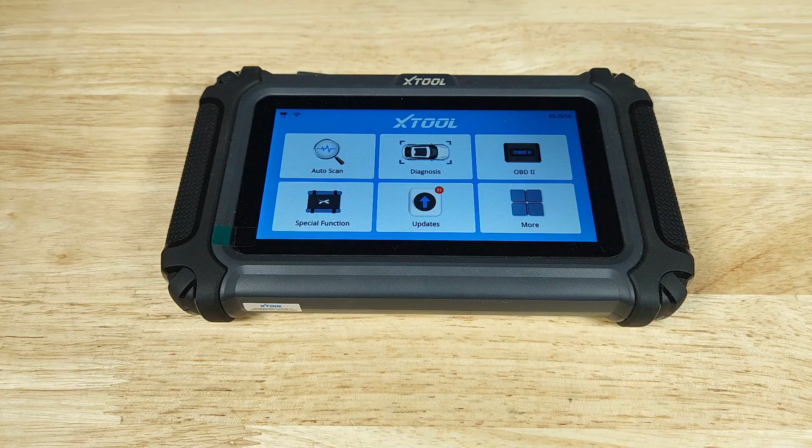Let's begin with some quick size references so you get a better idea of the overall size of this OBD2 reader. Here's a quick look at how thick it is -- just a little bit taller than a deck of cards. Let's take some rough measurements here. From end to end lengthwise, we've got just about 7.5 inches long. Let's see how tall it is -- just about 4.5 inches this way. And let's run a ruler across this way to see how thick it is -- just under an inch, looking like about 7/8 of an inch thick.

All right, let's get this on the scale so you know how much weight you're going to be hanging on to. Coming in at right around 14.1 ounces. And just in case you're wondering what 14.1 ounces feels like, if you've got a bottle of water around the house, fill it about 3/4 of the way -- that'll get you pretty close.

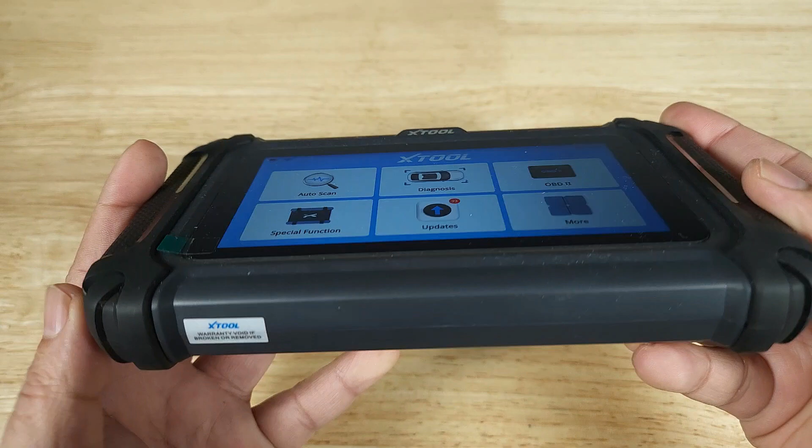Very clean and simplistic design. Plastic housing, rubber grips on the sides, gorgeous color screen about 5.5 inches. There are no ports on the bottom or sides -- everything's in the front here. This is where your data cable plugs in, and the on/off switch. Underneath this flap we have your charging port, a USB-C, and a slot for a micro SD card supporting up to 32 gigabytes in case you want to save anything. It also has an internal battery of 3,150 milliamps in case you want to take this around and view your data.

Here's a look at your opening home screen. You basically have these 6 tiles. We're going to be doing most of our dancing on this guy right here, but I want to point out this one first -- updates. You can see I have 93 updates waiting, and a great benefit of this device is you never have to pay for them. Updates are lifetime, free. Some devices charge you an annual or monthly fee, and those are really important to have because manufacturers are always sending out updates so you can continuously repair your car. But with this device, updates are lifetime, free.

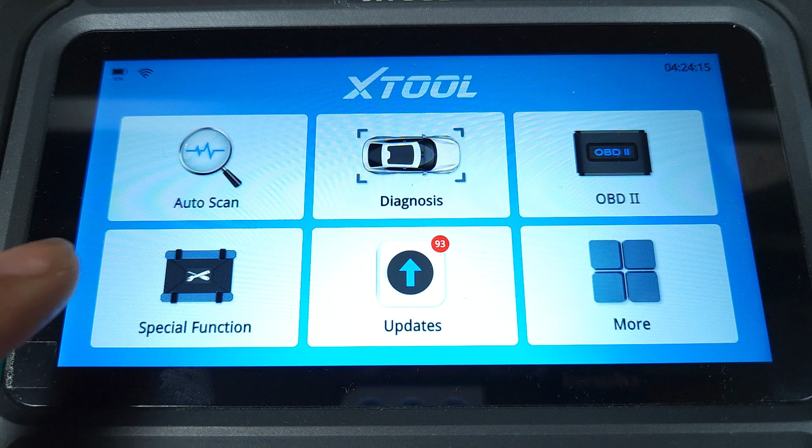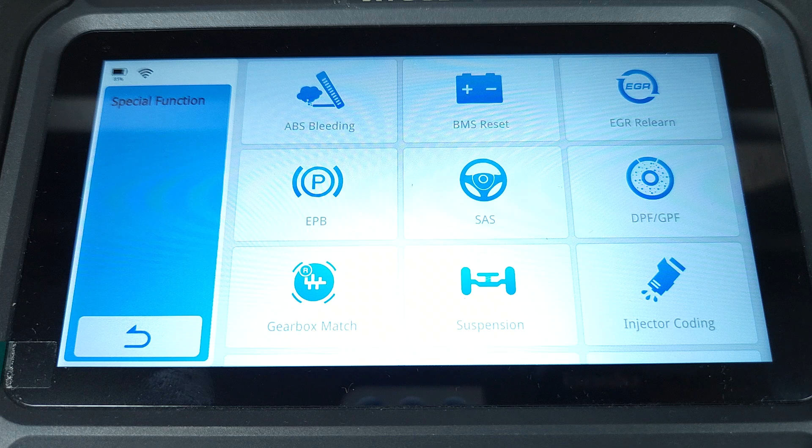This device will enable you to read information from your engine, transmission, airbags, and brake systems. Here on the bottom left we have the special functions tab, giving you access to 15 of those with this device. Most of the time you'll use this after a major repair -- you plug it in so the computer can relearn certain settings. I'm more excited that I can use it to reset my tire pressure sensor, because when there's a temperature change your tires go flat and you have to reinflate them at least 2 or 3, maybe 4 times a year. It's really nice to have the ability to reset this by just plugging it in.

All right, let's put this baby to work. Now, this next portion is not professional advice, but I at least want to show you guys one of the things I scan for when I'm trying to buy a used car.

We're going to have a look at the oxygen sensor voltages. There's a couple of really good reasons why you want to look at oxygen sensor voltages. Number one, of course, to make sure that they're working. Because if you've ever tried to get an O2 sensor out, especially if you're in a state with a lot of rust, sometimes those sensors are in places that are really hard to get, and sometimes they're just frozen on there. So to avoid that whole hassle, just make sure they're working.

Second, it gives you an idea if your engine is running lean or rich. If the voltages stay low, that means it's lean. If they're super high, that means it's rich. It gives you an idea if there may be a vacuum leak coming from the engine or if your fuel injectors aren't working. So that's another reason to check your O2 sensors.

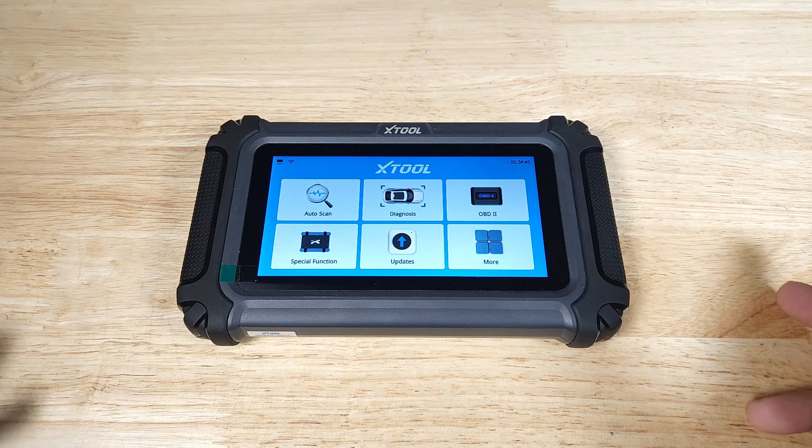And then finally, the big one: it gives you a really good idea if your catalytic converters are working or not. Really important, especially if your car has 2 catalytic converters.

Let's have a look. All right, guys, we are plugged in. Engine is not on, and I just wanted to show you that when you're plugged into your car's OBD2 port, it's charging the reader at the same time.

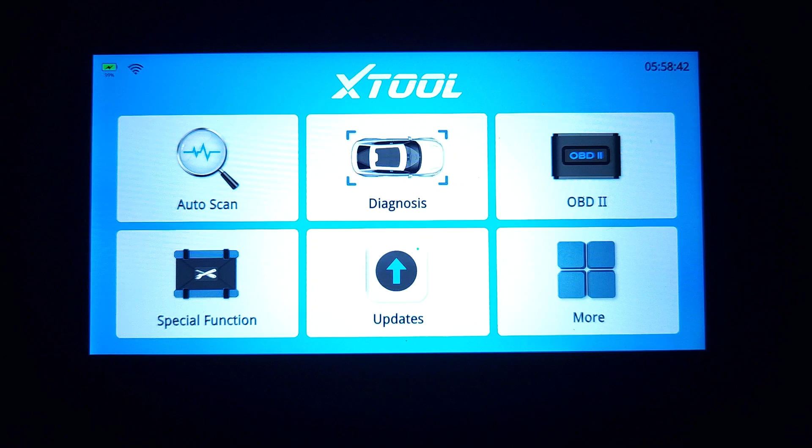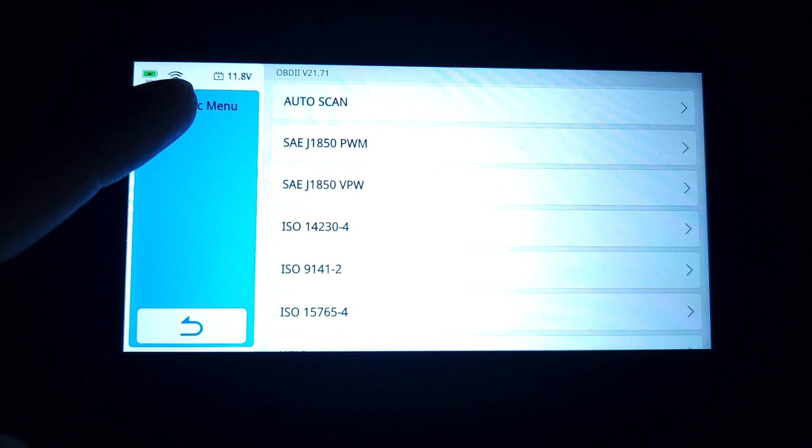All right, gonna turn the key on to the first click, click on OBD2, let it run. Here's what the next screen looks like, and before hitting auto scan, just wanted to point out that you can see your current battery charge, and it's really low, right? 11.8. It should be at 12.5, so that's a good bonus feature to have.

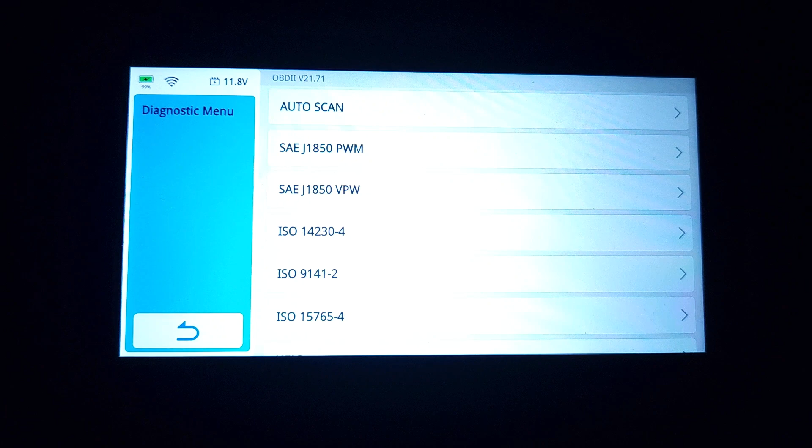Another thing you can use that for is when you start your car, if your alternator is working properly, that should jump right around 14.5 volts. So a nice little touch up here.

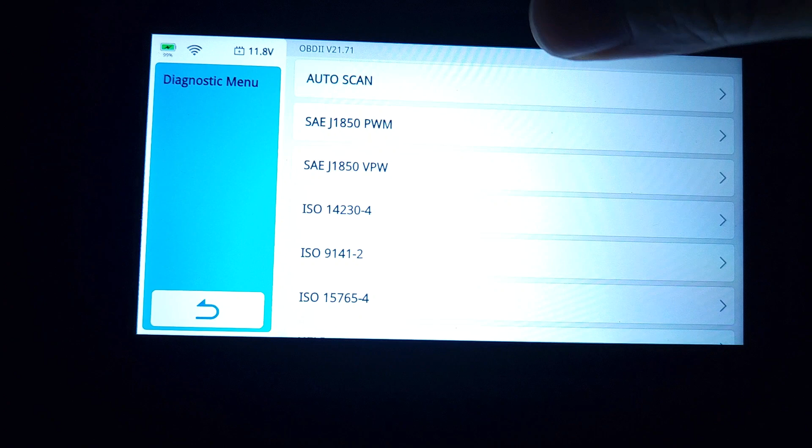Now we're going to touch auto scan. Here's what the next screen looks like. We're going to be doing all of our work right here in live data mode 1.

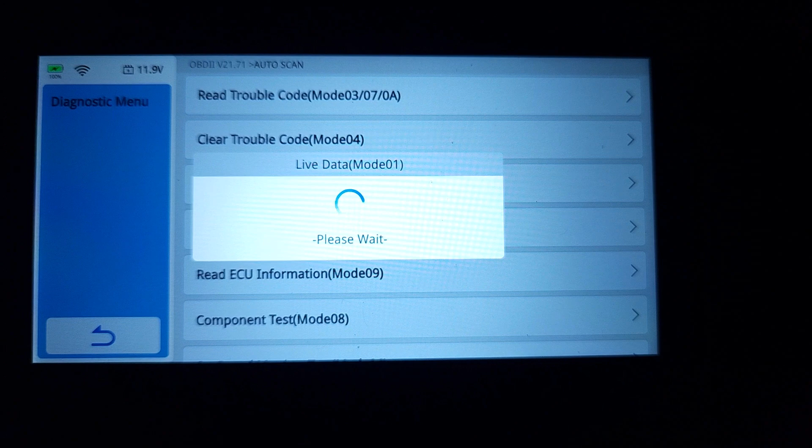Now, I still haven't turned the engine on, but I wanted to show you a very important step. We're going to click here, and what we want to look at is this reading, fuel system. Right now it's OL, open loop. We want it to say CL, closed loop. That means the computer is in charge of the O2 sensors. That's very important — you just got to let the car run for a while, and it'll turn into closed loop.

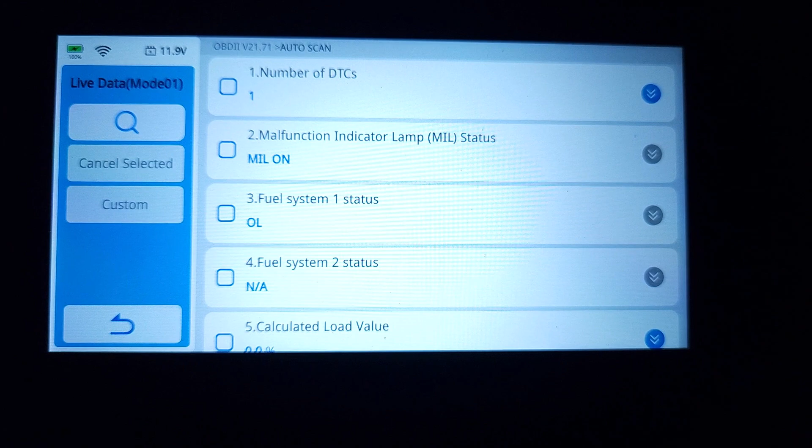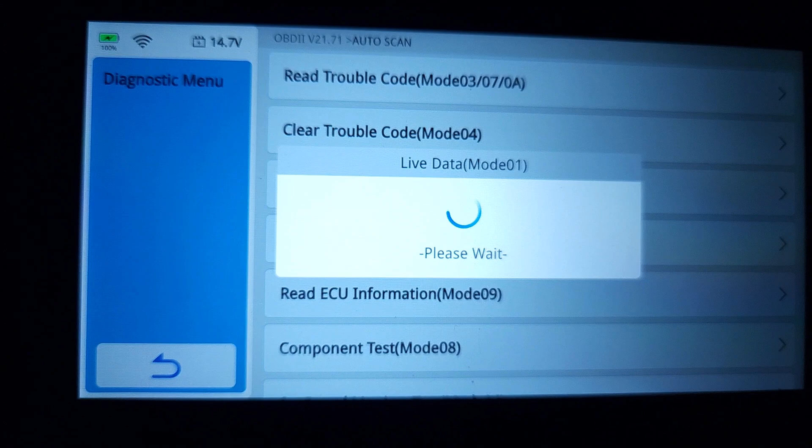Let's do that now. All right, engine's been running for a while. We can see here that voltage has gone up to 14.7 volts. That's a good sign. We're going to go back into live data and double check that we're in closed loop, and we got CL right there.

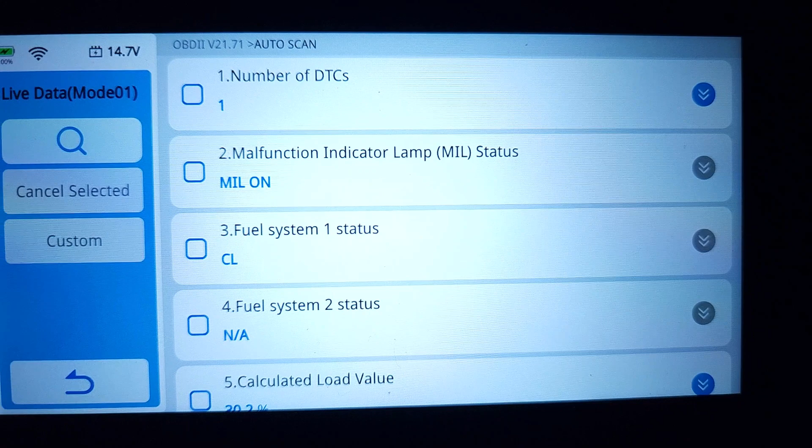So that's good. And I don't know if you guys caught it, but if you look right above the closed loop indicator, you can see my malfunction indicator lamp is on — my check engine light is on. We'll bypass that for now and scroll down until we find our oxygen sensors.

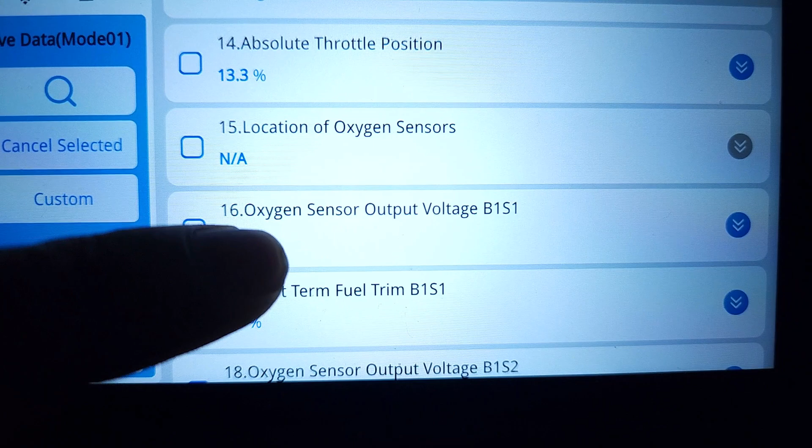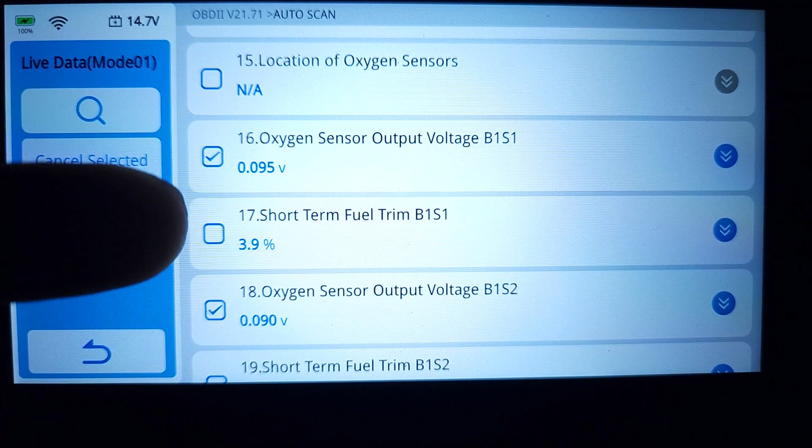There's bank 1, sensor 1. I only have 1 bank — this is a 4-cylinder. And right down here is sensor 2. Got both of those selected. I want to point out that experienced mechanics can look at these numbers and just tell you exactly what's going on.

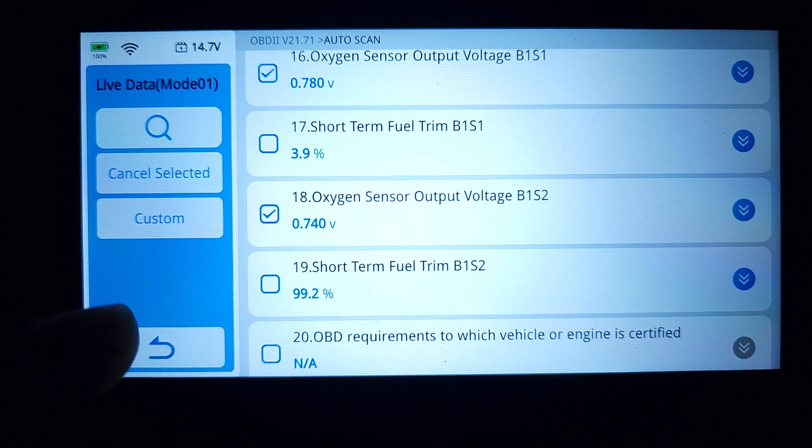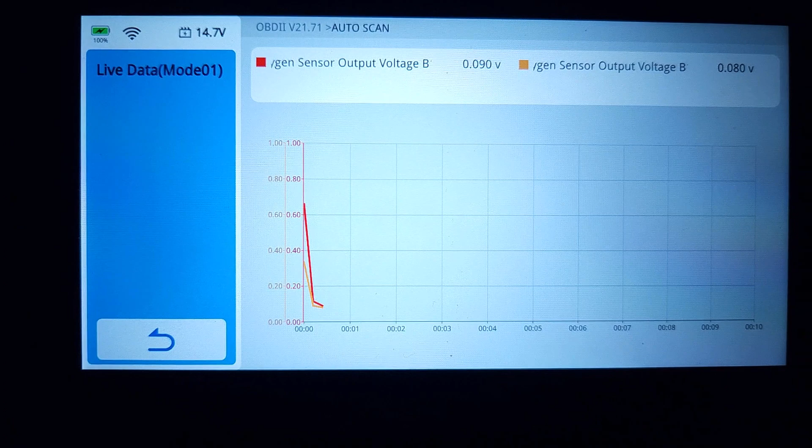But I need graphing, so let's have a look at how that works. If we look on the left side of the screen, there's this custom button, so I'm just going to click on that. And once we're on this screen, you can hit combine. Now on a graph, we're going to be able to see both sensor 1 and sensor 2 and how they're behaving.

At first glance, you're thinking, all right, we got voltage on both sensor 1 and sensor 2 — they're working. And it's true, they both are working, but there is a massive problem with both of them reading like this, and it's probably the reason I have a check engine light.

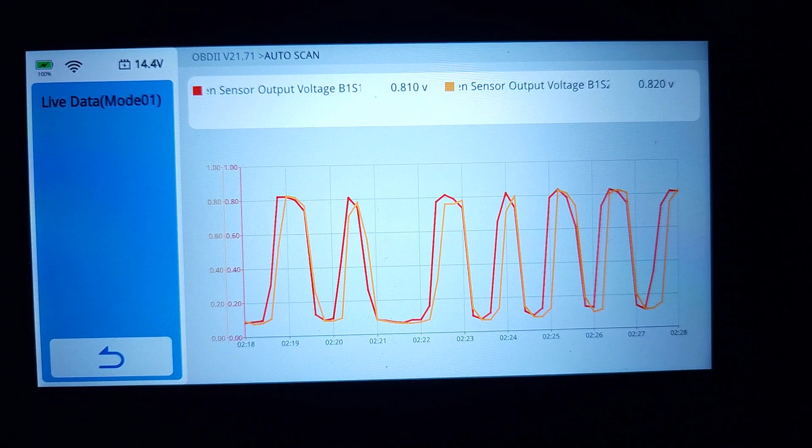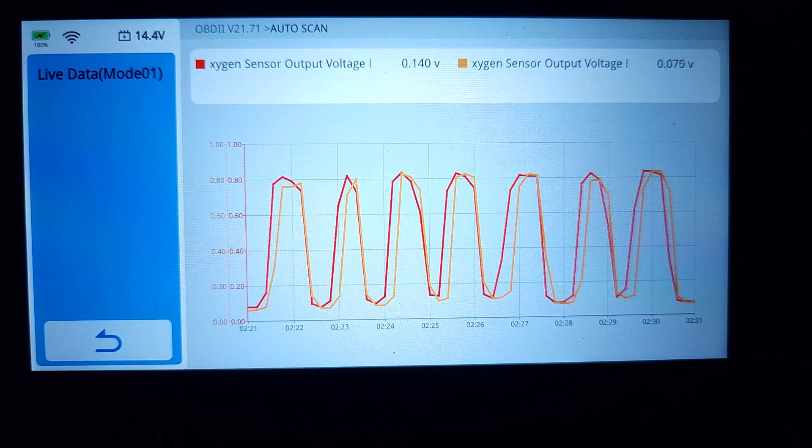Let's begin with the red line, sensor 1. This is before the catalytic converter, so there's all kinds of exhaust passing through it, and that's why it's important for it to oscillate up and down above 450 millivolts and below. So sensor 1 is doing what it's supposed to do — beautiful oscillation.

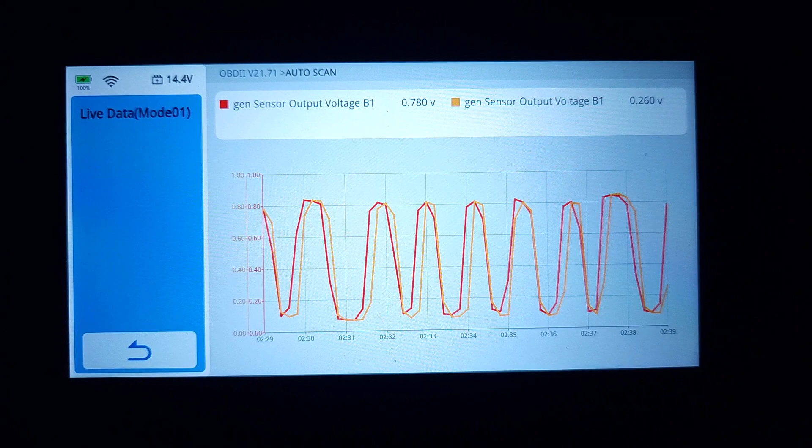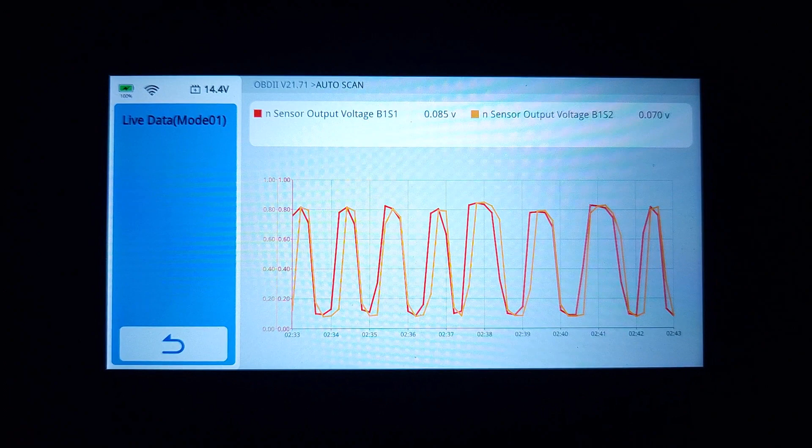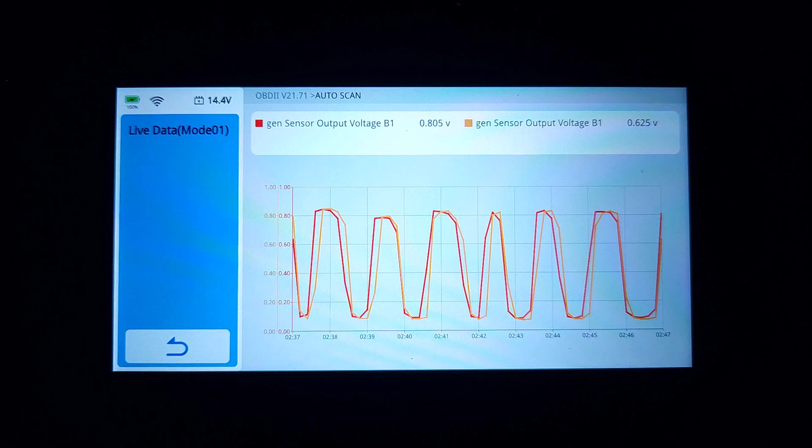Now here's the issue: the yellow line, sensor 2, is after the catalytic converter, and it should be flat if the catalytic converter is filtering out all the exhaust. But as you can see, it's matching sensor 1, so it's not doing anything. So I probably have a bad catalytic converter, and if you're in a state that has emissions, you've got to have it replaced. And remember, if you've got 2 of those and both of your sensor 2s are acting like that, that's 2 bad catalytic converters.